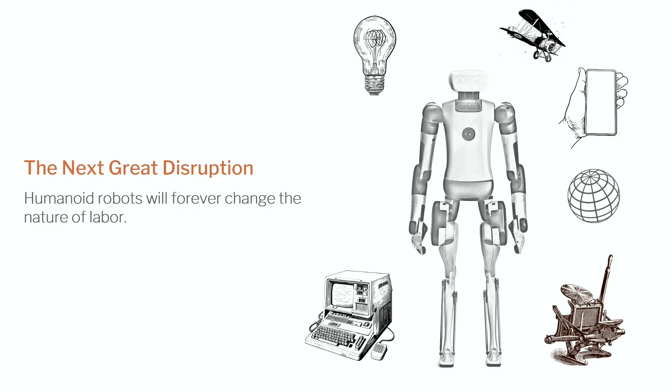We believe that humanoids are one of the great next disruptions. They basically are robots designed to operate in human spaces. So there's a large market opportunity there for us.

Obviously, we would say that we are in that business, but we are not the only ones. Lately, there's been a lot more traction on this. Goldman Sachs and Citigroup and a bunch of other investors throw out a lot of big numbers, and I'm not gonna say that they're right. The main point here is that there's more traction, more people believe in this vision.

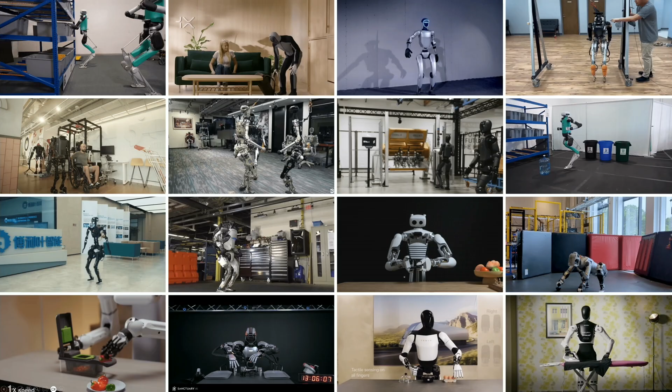We're not the only ones. There's an ever-growing number of companies out there. In fact, if any of you are following investment news yesterday, Figure just announced a fairly eye-popping VC round. There's always been Boston Dynamics. There's us, there's Unitree, there's a whole bunch of other companies across the world investing in this space, and obviously we all see something there.

I think most of us believe in this vision that humanoid robots are going to be, at some point, everywhere. Just like most people believe autonomous cars are going to be everywhere, even though we're not quite there yet.

The way we see this is that the entry point to humanoids doing useful work is in the logistics and manufacturing space. That is one of the more structured spaces, one of the more constrained spaces, one of the spaces where the return for investment is more immediate. And that is what a lot of the humanoid robots companies are focusing on.

Beyond that, the market grows. It could go into things that are a little bit less constrained, things like grocery and retail, construction. In all these places, there are jobs that go unfulfilled. There are millions of jobs that go unfulfilled in all of these spaces.

Beyond that, obviously, anybody who's ever seen the Jetsons or anything, envisions a time when robots are going to be in the home. But we believe that will happen eventually, just not anytime soon. The safety concerns alone are huge. But in order to get there, you can grow through all these spaces.

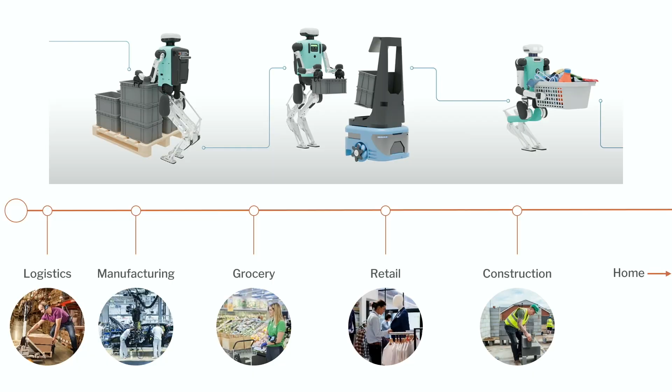So why should you listen to what I have to say? Well, humanoids have been part of our company's legacy for at least 10 years. It started out in a university lab at OSU, Oregon State University, and then we've gone through many generations of humanoid robots, starting off with locomotion and then manipulation and vision, and more lately vision and sensing and compute.

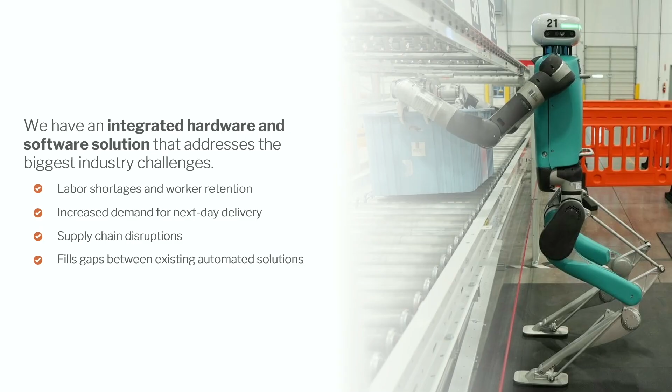We have an integrated hardware and software solution, essentially meaning that we have the robot and we have the software to run it, and also along with it, all of the peripherals that go with it.

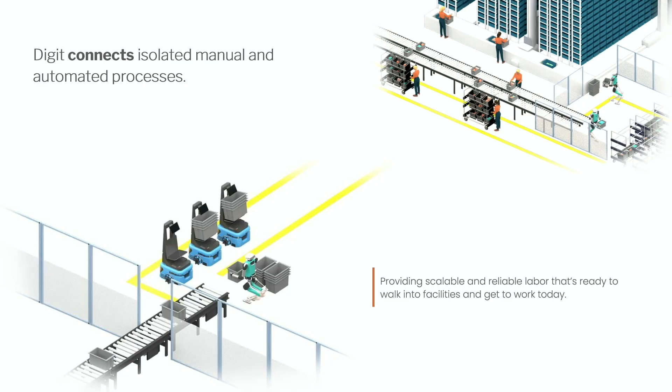Digit, which is our main robot right now, connects isolated manual and automated processes. It can provide scalable labor, and we can get things going within a few days, essentially. You can get a workflow going in a few days. We also have a full solution, including fleet management, security, user interfaces, all the stuff that makes a solution a solution. I'm rushing through this a little because this is not the meat of the talk.

I just want to provide a little background. We also just expanded into what we call RoboFab, our new manufacturing facility in Oregon, near Salem, Oregon, which has a production capability of about 10,000. Obviously we're nowhere near that, but it provides us the room to grow, and it gives us the ability to control quality, and it provides economies of scale and taps into the global market.

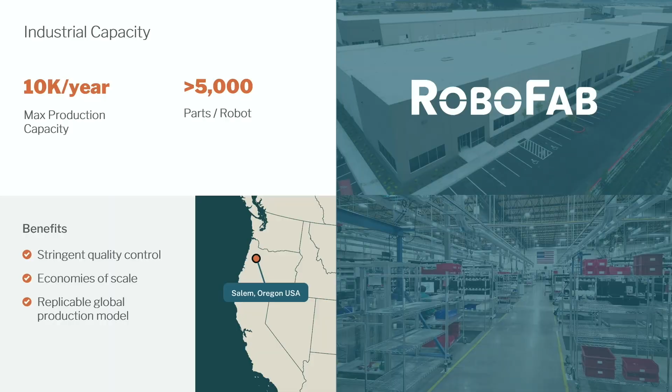Our overall market expansion, like I just mentioned, starts off with some of the things that we can do now, which are around logistics, distribution, fulfillment, all those things. And then the idea is to build on top of that, both mechanically and software-wise, to be able to expand into an ever-growing number of markets.

All right, so how are humanoids different than any of the millions of robots that are out there in the field right now? Obviously there's thousands, if not more, of autonomous cars. There's millions of AMRs out there. There's even legged robots like Spot and so forth. There's millions of drones, obviously. All of these are just other types of robots.

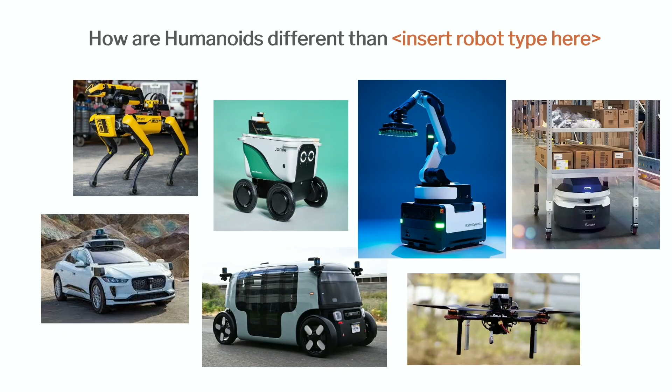So why can't we just use what any of these are using? In some cases we can, but there are some very key differences between most of these robots and humanoid robots.

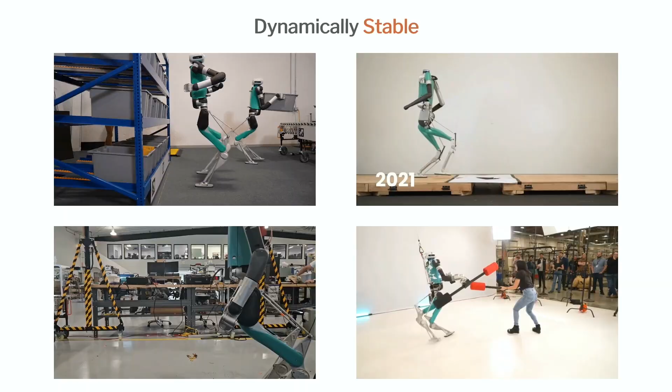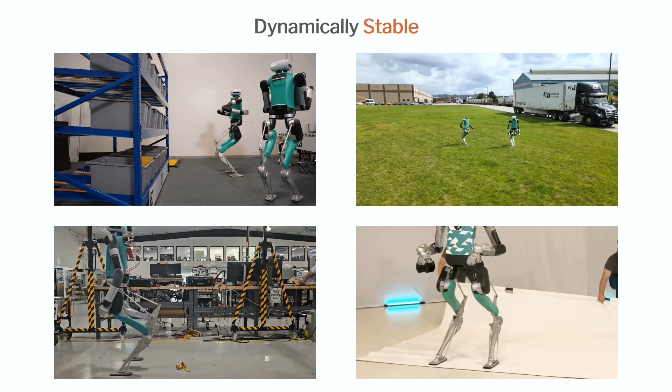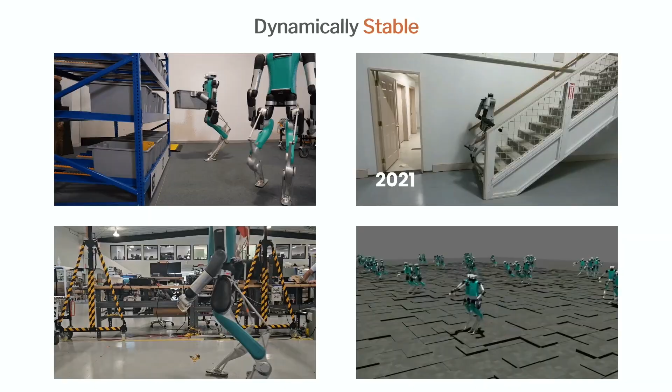One of the major differences is humanoids are dynamically stable, or if you're half glass half empty, dynamically unstable. But essentially, what this means is that the robot can walk over uneven terrain, can operate in dynamic environments, can deal with things like stepping on a banana peel for some reason, can walk outdoors, can walk inside. It's very dynamic in what it can handle. But this obviously is completely different than a wheeled robot, and for good reason.

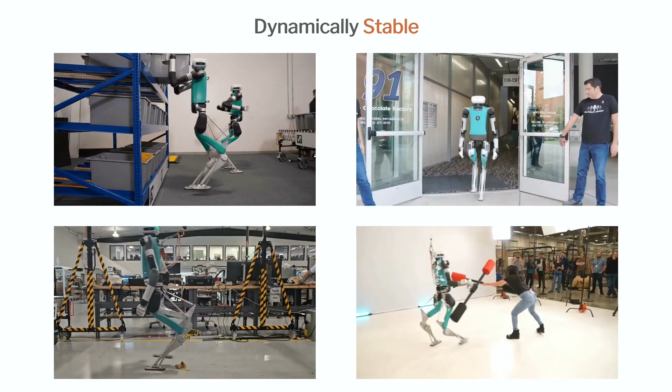Also, humanoids can operate in dynamic spaces designed for humans. What does this mean? It means it can operate into narrow aisles, it can go up and down stairs, it can operate in any of the spaces that have been designed for humans, which is all of the world, right? So we all take for granted that we can walk into this building, we can go up and down the stairs, up and down sidewalks and so forth. Those can be quite tricky for some other types of robots. And obviously you can design another type of robot that can operate in some of these spaces, but a humanoid is designed to operate in pretty much all of these spaces seamlessly.

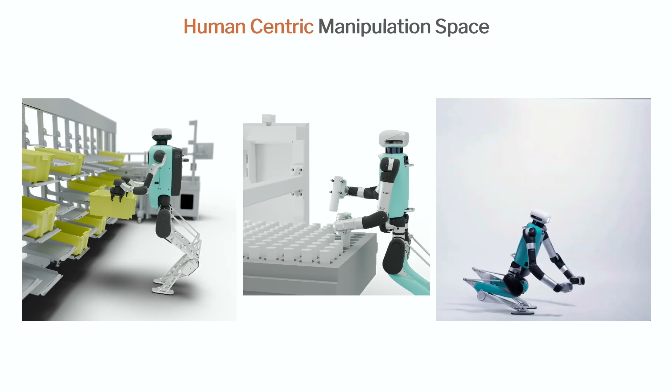And then the other major factor here is that, unlike, let's say, an AMR, we are a mobile manipulator. Humanoid is designed by definition to operate in human-centric manipulation space. What does that mean? It means that basically we can lift at least 25 kilograms, right? So that is something that a logistic worker will do often, right? But we want to be at least that. Humanoids can pick up boxes or any object low off the ground or high off of a high shelf. And then we can also manipulate different sized objects. It could be something as big as a large box, or it could be something as small as a part. So anywhere in between, we have to operate in this rather large manipulation space.

So that was just to set the scale. So what are some of our sensing needs, right? Why is this a little bit different than other robots?

Well, first of all, one of the major differences, like I mentioned, is walking. We need to be able to know where we're walking and to be able to do things like footstep planning and decide where we need to step. Then obviously we need to do mapping, navigation, localization, which is very similar to other robots, except that we have fewer constraints. We're not just moving on wheels. We're holonomic, we can move in any direction, we can bend, we can twist, we can do all these things.

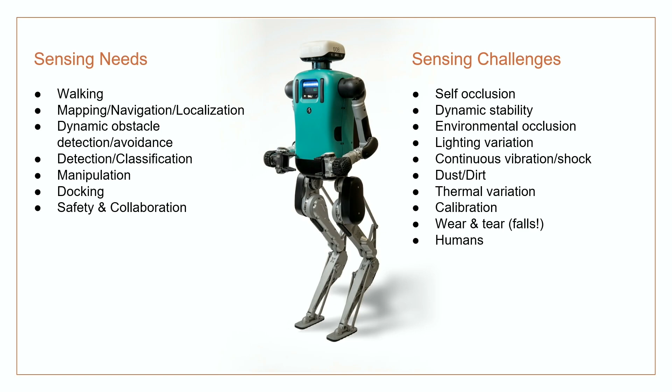So I just wanted to show some examples here. Obviously walking, mapping, navigation—you need to be able to figure out exactly, we literally plan every step, and you need to know that it's safe to put a step there. That's the planning side of things. The dynamic stability part can handle unplanned divots in the road or anything along those lines.

One of the videos I glossed over earlier showed the robot actually stepping through a thin piece of paper. It can handle all of that. There are lots of videos showing the robot just stepping over garbage in the street and so forth—it can handle all of that, but you shouldn't have to. The whole idea is to essentially plan around things like that. That's for the unplanned side of things.

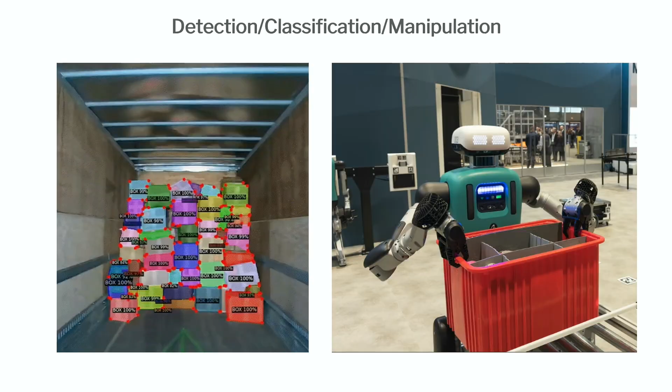And then obviously we need to know where we are, where objects that we're trying to manipulate are, and all of that. Detection, classification, all those are a given. You need to be able to detect all the boxes and totes and other parts that we need to manipulate, look at what we're trying to manipulate, and pick that up.

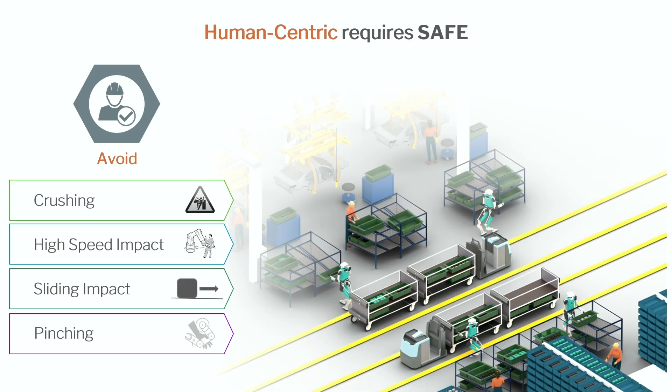And then the aspect that's kind of new, which hasn't been talked about a lot by most companies in the space—I think we're one of the first pushing this actively—is the idea that operating in human spaces means we need to be safe around humans. Otherwise, we're stuck in a work cell, which doesn't really make it a human space. It just makes us a very expensive robot in a work cell.

So what does safe mean in this context? It means we need to avoid any crushing, high-speed impacts, sliding impacts, pinching—any of those things that can happen when our robot interacts with humans. So should our robot try to pick something and bend its arm, and somebody sticks their hand in there, that would be a pinching hazard, for example.

This is from one of our live demos at, I believe, ProMat or a robotics show. The robot had been running for many hours, and it had an unplanned power error—the power went out, and the robot falls. This is what happens with a dynamically stable robot. If you had an AMR here, it would just pause on its wheels.

And that has to be okay. It will happen, whether unplanned or planned, in the sense that for some safety reason you cut off power—like an e-stop kind of thing.

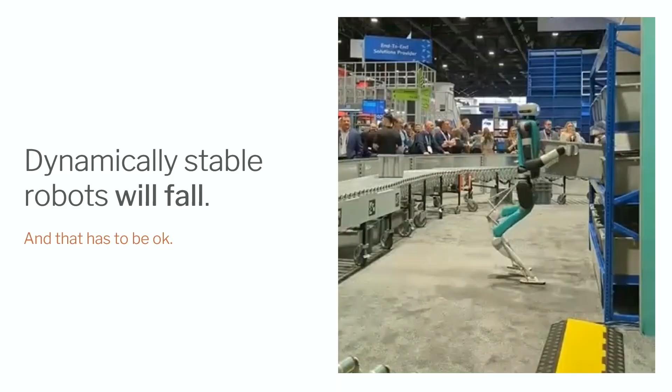But in order for this to be safe, we basically need continuous safe detection around the robot at all times. Safe essentially means multimodal and certified—that's a given. And continuous means we can't have any gaps large enough to hide any obstacles that we care about.

The other issue with being safe is self-occlusion. If you place the cameras in such a way that the arm movement occludes them, you're creating a gap that is dynamic, but essentially something can happen in that space if you don't account for it.

The other aspect is that the robot can bend and tilt, and the fields of view are going to change. This brings a lot of challenges because you can't just have a 180 camera in the front and a 180 camera in the back and have full coverage. Even in that case you'd still cut gaps on the side. It's not enough to do that. You need more coverage.

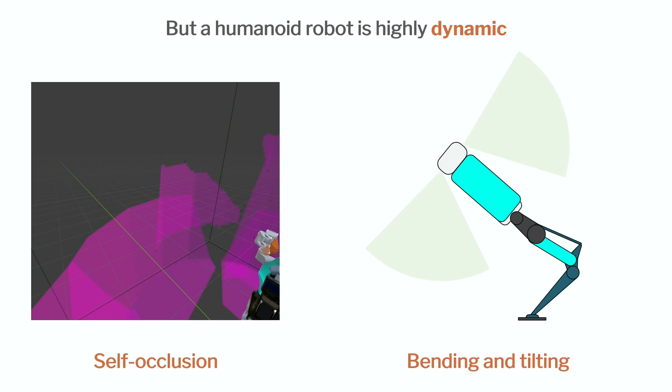So these are a lot of the challenges we're faced with, but I want to introduce something else I call the weight death spiral, similar to the rocket weight equation. The idea is that any sensor, compute, or payload you add to the robot increases the weight. That has the potential to increase the actuator size because you need more power to lift yourself and maintain the characteristics of lifting 25 kilograms and doing manipulation.

That increases the amount of structure you have to add to the robot. To have a heavier motor, you need more structure around it to protect it. That increases the battery size. You can't reduce the runtime - you have to still run at least 90 minutes, 2 hours, whatever, plus with a very short recharge. That increases the weight, and so forth. So anything you add to the system starts this weight death spiral.

So it can be very tricky to manage this. And it emphasizes that for us, we don't want to end up here - although that would be cool. I think I just baited everybody who laughed at that, but this is from Robocop from the 80s. Anyway, essentially you don't want to end up with a really huge robot to accommodate all of these things. You want to go the other way.

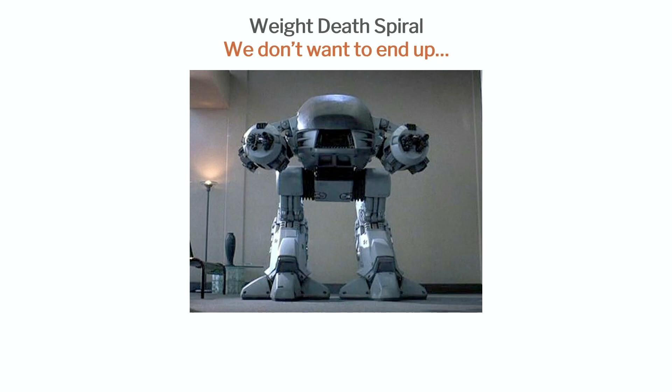You want to unwind that spiral and make your robot as light as possible, which reduces the actuator size, which reduces the battery, and so forth. It also makes safety a lot easier if the robot is lighter. Though I will say that a robot being light does not make it safe. I'm sure some of you have seen the video of one of the little G1 Unitree robots swinging its arms when it lost control. That is not safe. This emphasizes that size, weight, power is not just important - it's critical to our design of the robot.

So what are some of the sensing modalities we use on humanoids, but really any robot in general? Obviously depth in any variety - stereo, light modulation, time of flight, LiDAR - any of those are highly used on pretty much any robot, including ours. EO cameras such as RGB cameras as well. These two are the main modalities used on most robots for good reason - they are time-proven and very useful for pretty much every task we do.

But there are other modalities becoming more useful. They've been used in cars and other outdoor robots, such as thermal and radar, especially now with 4D radar, the imaging radar, which provides more capability. Sonar and ultrasonic have always been used in some fashion, but nowadays there's even 3D ultrasonic, which is also becoming more useful. Inertial sensors are obviously used a lot - IMUs, gyroscopes, accelerometers, and so forth.

And then there are things more unique to legged robots in general - not just us but also quadrupeds - like force torque sensing and pressure sensing. Those are used a bit less because of the cost and the added weight they can add, but as those come down, we use more of them if they don't add too much to the robot. This is an example of our last generation robot, where we have a LiDAR, an IMU, a whole bunch of depth cameras, force torque sensing, and some other stuff I didn't bother mentioning here.

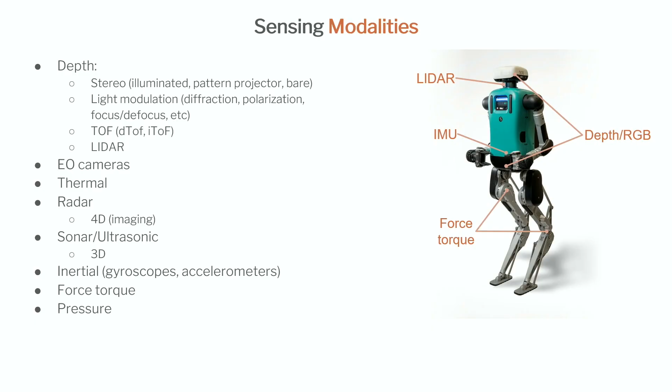So obviously for most startups, robotic startups in the beginning, they tend to gravitate towards off-the-shelf sensing. It's easy to use. The automotive sensors have been great to some degree. They're reliable and proven. Many have ASIL ratings, many have IP ratings. They come with better interface options than commercial interfaces like MIPI, GMSL, T1. These are very reliable and good options.

But usually they're optimized for a car. So you add another kilogram to a car, who cares? You add another kilogram to our robot, that's a big deal. They also tend to be quite expensive. The volumes are not quite there yet.

And they're optimized for long range. A LiDAR might be optimized for 100 or 200 meters. I don't care about that. 200 meters is already way outside of my range of things. So all of that power and getting that range is useless to us. You end up with fairly large sensors. They're good, but they're not quite optimized for what we need.

Same for AMR and AGV sensors. There's also a bunch of sensing there that we can use, but for whatever reason, even though AMRs have been around for a while now and there's millions of them out there, a lot of them still use sensing with commercial interfaces, which are problematic, right? Things like USB, even DDR can be problematic for a robot like ours. And they're not nearly as rugged for vibration and shock. Something on wheels doesn't have the same level of requirements for vibration.

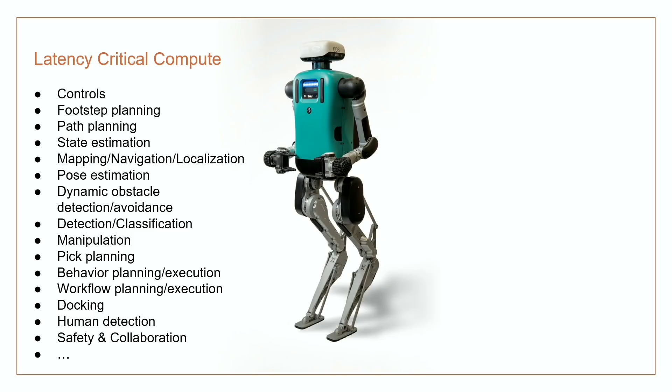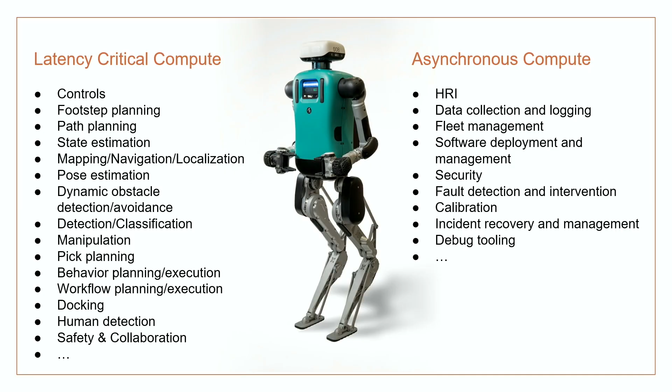Data collection and logging - this is huge. Even just for debugging purposes, but also for collecting data for better models and so forth. That's part of a lot of the secret sauce. Fleet management, security, fault detection, calibration, incident recovery and management, and all debug tooling - all this takes a little bit of extra computing.

For prototype systems that's relatively inexpensive. Of course, when you start building thousands or millions of these, those costs add up quickly, and plus they're not as customized and reliable as a fully optimized solution. Also, you're wasting a lot of power - the compute efficiency of that type of system versus something like your phone are quite different.

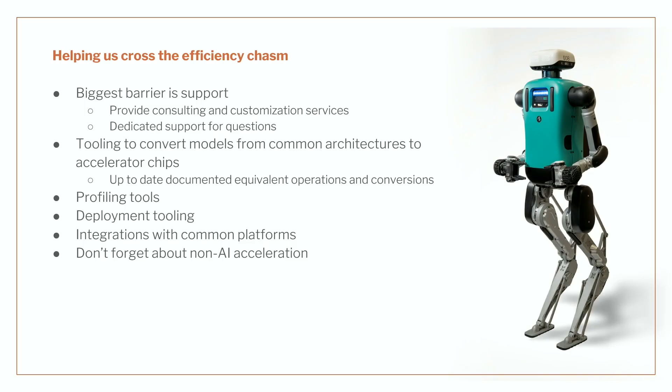And that's it. Thank you.